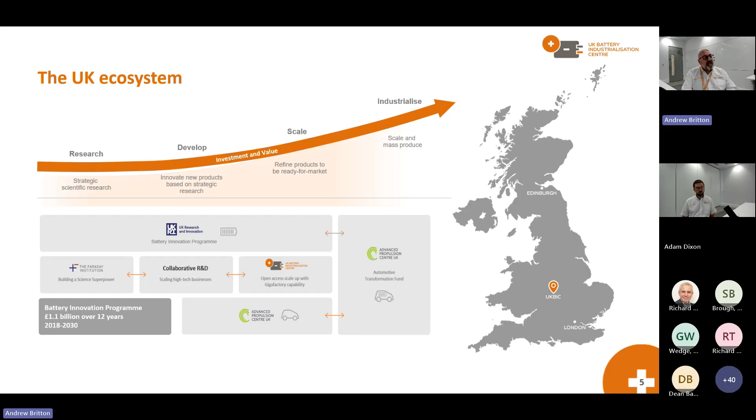In the latest spending review, the Battery Innovation Programme was given an additional £452 million of funding to support the battery industry going forward. That is money that will be available between 2025 and 2030. The structure will remain relatively the same: we will have the Faraday Institution, we will have the collaborative R&D running competitions, and UKBIC will be the scale-up facility within the Battery Innovation Programme going forward. So no major changes to the structure, but the organisation and the amount of funding has had significant changes over the last 3 to 4 months.

Where were we and where are we going? Historically, the battery industry or the Battery Innovation Programme has gram scale at the Faraday Institution stage, which is really looking at early stage materials research and advanced materials, what is going to come beyond lithium ion, proving out battery materials and components - really early stage stuff.

And then we move on to the kilogram scale, which is really looking at university scale pilot lines, and looking at early stage product development, starting to develop individual cell manufacturing at very low scale, and doing a lot of the product design there. Now, historically, we then jumped to what we now call the industrial scale-up line.

This was the next part of the journey for organizations looking to industrialize and scale up battery technologies. The industrial scale-up line is a gigascale line operating with gigascale type equipment that you would find in any gigafactory anytime, anywhere in the world - same equipment, same scale, same amount of material requirements. And it is there to help people de-risk their product and commercial investment before moving to the kiloton scale.

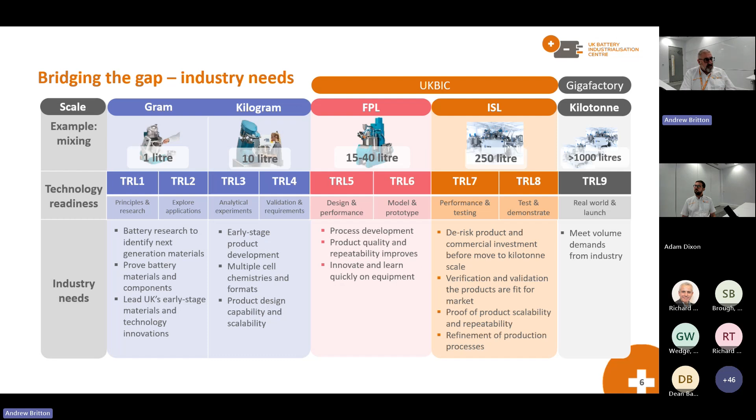At UKBIC, we have a full-scale electrode line, cell assembly, formation and test, and module and pack. Many of you will have seen this, heard it - it's been a constant through the history of UKBIC over the last 5 years. We are a UK manufacturing and research facility, based in the Midlands, in the heart of the UK, and in the heart of the industrial sector and industrial manufacturing in the UK.

We are open to all organisations who are looking to scale technology. And another thing that's changed over the last couple of years is that we are now a truly global operation, so it doesn't matter where you are - if we can help you to scale up your manufacturing, we are here to help you. We can give you access to gigascale equipment, and we can provide trials and validation at industrial scale with speed and quality.

One of the things that's always made UKBIC unique is that we do not want to own any intellectual property. So you will come to us with your IP, and we will scale that up, and we will jointly develop intellectual property between us. But at the end of the project, we will bundle all of that intellectual property up and return it to you. So there is no question of license fees, royalty agreements, or anything like that.

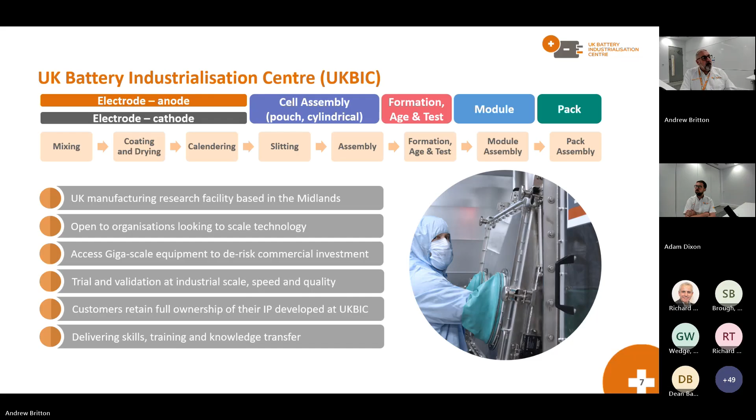So, talk a little bit about the industrial scale-up line. As I mentioned, it's a volume scale battery manufacturing facility. Same equipment that you will find in gigafactories around the globe, but we don't necessarily have to treat it as an end-to-end facility. It is a modular facility, so customers can come to use us at any part in the process.

We've had customers who've come to use our electrode line. We've had people who've brought powders and just want us to make a slurry for them. We've had people who've brought a slurry who want us to coat it for them. We've had customers who've brought electrode to us and who've wanted us to assemble cells. And all of that is absolutely fine. So you can pick and choose the parts of the process that you need.

UKBIC has developed 2 baseline cell designs, which can be used by customers to further develop and scale their own technologies. So if you've got an interesting new anode material that maybe you put some silicon in it and you want to see how it performs against a benchmark battery, we can put that material into one of our cells and show whether or not it gives you a performance benefit.

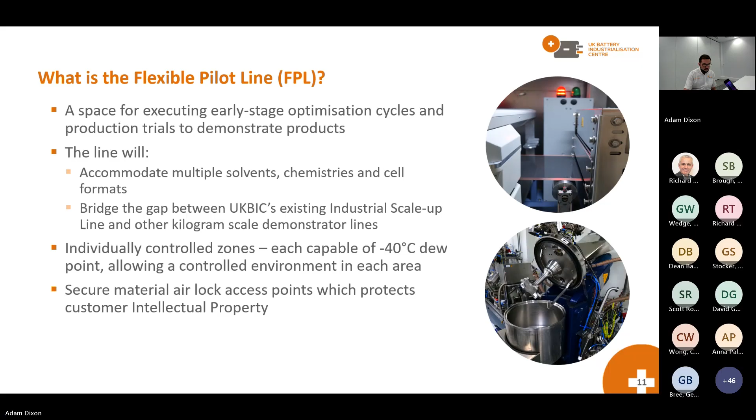Okay, so the next video which we're about to play is the FPL line all the way through. So I won't talk, but please take it in and watch it.

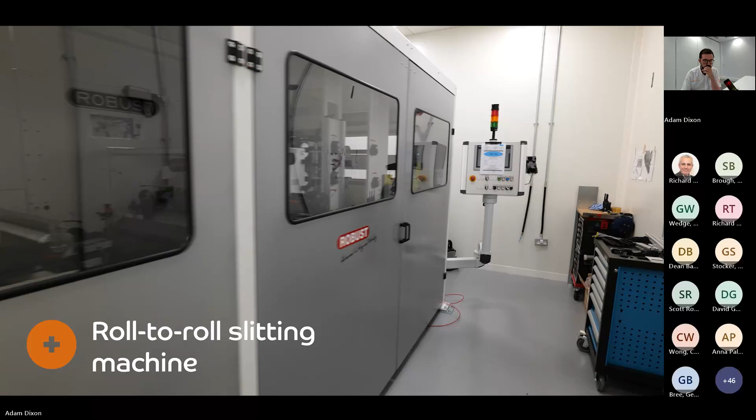So we'll touch on that video in a minute in a bit more detail, but obviously you've seen the end-to-end current state. To be honest, it's about 2 weeks out on that video, but that was the status of the line. As Andrew alluded to, it's in a commissioning phase at this stage.

So to recap, on what's been said and what I've alluded to early on, the benefits of FPL are it offers developers early access to battery manufacturing scale-up. This scale is a lot smaller than ISL. It's obviously bigger than university scale institutions, quite local here to Warwick Manufacturing Group, but it's definitely smaller than the ISL line, so it sits in a niche area for customers.

The line is called the flexible pilot line for a reason. We've adopted many things which enable us to go between chemistries, to have flexibility within control systems, to have the ability to handle multiple solvents, multiple materials, anode and cathode capabilities, low flash points, etc. So the flexibility is there.

The beauty of the line is it's smaller, so it will require lower quantities of material for customers. It therefore comes with low cost, efficiency, and quick turnarounds. We can go between anode and cathode quite comfortably because the line is smaller. We can go between FPL and ISL should customers want to do that.

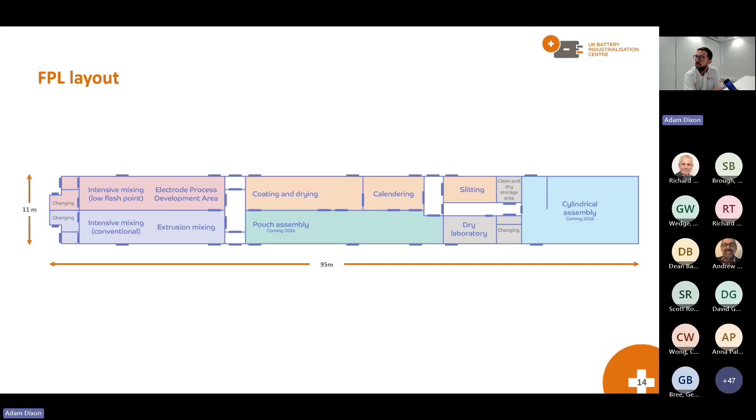Another unique part of this facility is we will have a dedicated store area, so we can quite comfortably store work in progress material at -40 dew point without the issue of expensive dehumidification. So we've obviously got dedicated dehums for those areas.

The first key process within electrode manufacturing is mixing. UKBIC has 2 dedicated mixing areas in its facility. As an ISL line, it has intensive mixing technology, and to adhere to that and for scalability between us and the ISL line, we fortunately have the same, so we can maintain the scalability of intensive mixing.

The difference being at FPL scale, we can do from 15 to 40 litres. These 2 lines have the ability to do conventional solvents, but we also have the ability to use low flashpoint solvents as well, from 15 to 40 litres. We also have some smaller intensive mixing lines.

These are part of an electrode process development area. The idea of this area is it's within the facility, but we can work with customers who don't necessarily understand intensive mixing technology, who maybe come into the business with planetary knowledge or other mixing technology knowledge. But obviously, to be able to work with us as a business, we need to convert those given recipes to stuff we can understand and process.

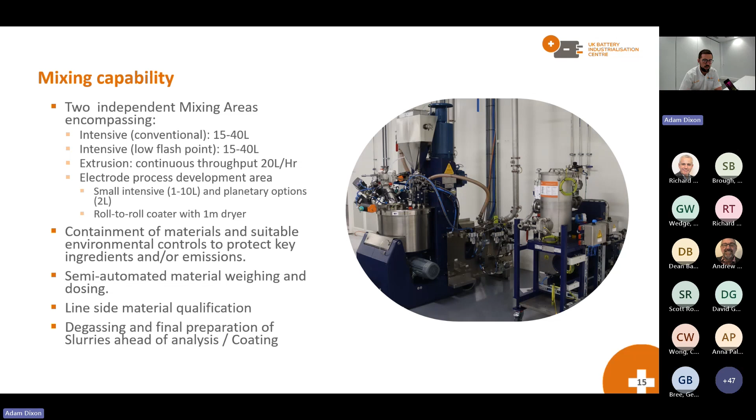The coating line, you'll see a video playing, I'll talk over the video. The video was the first processing of slurry that we did at UKBIC. You can see some anode continuous coating happening. This was probably over 2 months ago now, to be honest, so we're a bit more developed than this, but you can see some more visuals of the coater and the material.

We've subsequently switched to intermittent coating, which is more challenging, and we're now processing anode and cathode at the same time. The coater is a 6-meter dryer, and it focuses itself on slot die technology.

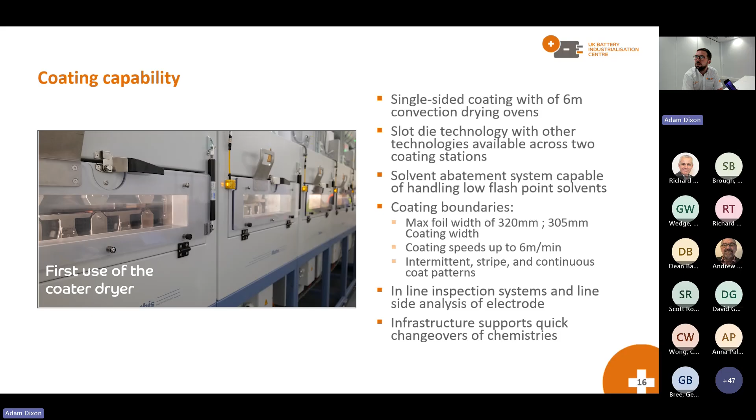We also have the ability to do other forms of coating through knife and comma bar. We also have ready ceramic edge coating. So we've got flexibility at the coating stations to be able to coat slurries, to coat ceramics, to coat meshes, metallized polymers. We're adept to be flexible.

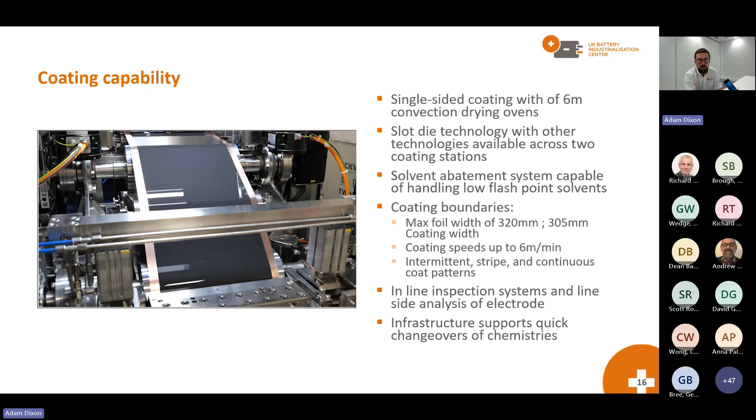As we said previously, we've got the ability to handle multiple solvents, so we're ready - we can handle it, we will have a permit in place which enables us to do that. We can coat up to 305 millimeters wide on a foil width of maximum 320. So it's smaller than our main line in its width, but the commonality is there for what we're trying to do. We can coat up to 6 meters per minute. We can focus on any particular pattern, which then goes towards a cylindrical cell, a pouch cell, or other types of cells.

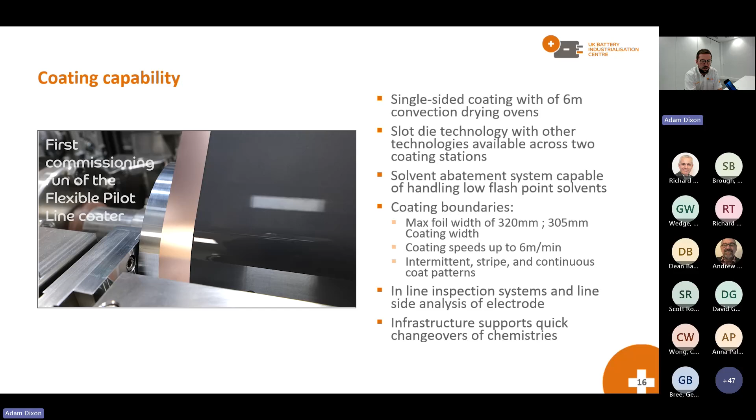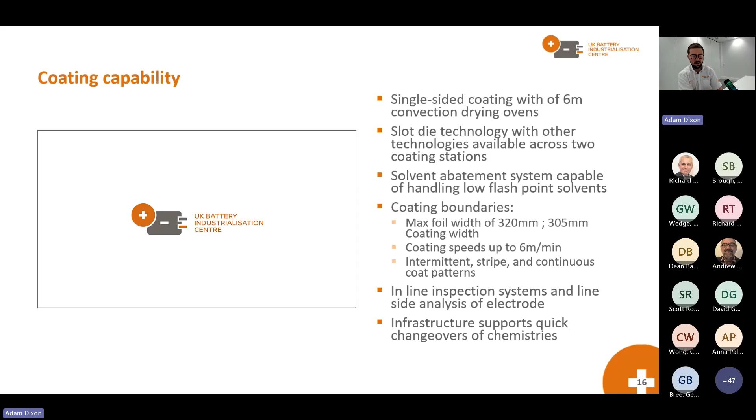We've got unique inline inspection systems. The idea of this line is we want to focus on traceability for the customer, so we've hopefully foreseen gauges in the right places, which enable us to give you good data to understand the product, etc. And you may think, why have we only got one coater? But we're quite confident in what we've done within FPL, that we've got the flexibility to go between chemistries quickly, and we have all the spares infrastructure in place to be able to do that.

From a calendering perspective, the image you see on the slide is the calender on the shop floor, albeit pre-commissioning. So what's unique about the calender? We've learned a lot at UKBIC about calendering. It's not a simple process by any means, it's not just squashing stuff - it comes with a lot of challenges. So a lot of lessons learned has gone into the calender design.

We have some similarities to our ISL line in the fact that we can calender at 150 degrees. We can use line loads up to 2,200 kilonewtons, but obviously this machine is smaller, so we can focus on smaller product - it's a smaller web path, and we can use less material. We've worked with a vendor who firmly understands the industry. We've got heating technology in the right places to help the product, to take away any imperfections, to get the right level of heating in before we compress it.

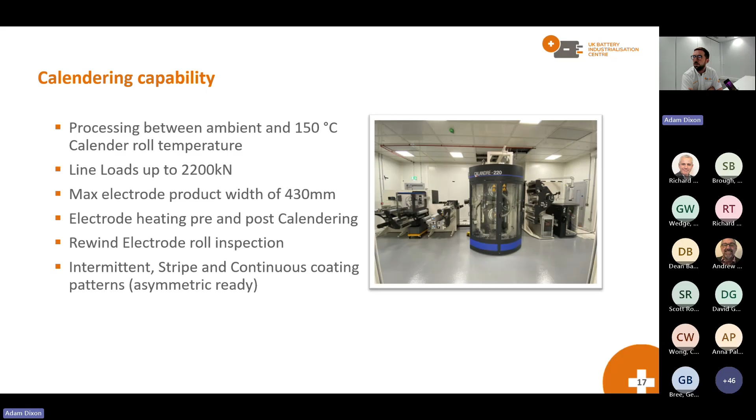And we've also made sure that we inspect the product, because we are firmly aware that we introduce a level of defects through calendering that we need to be mindful of before we pass this material through to cell assembly or back to the customer. And like the coater, it is suitable for all types of patterns.

The last machine in the electrode processing area of FPL is the slitter. The slitter is capable of running up to 80 meters per minute, so it outstrips the performance and line speeds of any of the kit that we have. But what we are able to do is go between anode and cathode independently, because we have cassettes. We have the changeover infrastructure to be able to do it.

We've heavily focused on the cleanliness of the electrodes, so we've got adequate cleaning inline to take away the imperfections caused as a result of slitting, like burrs, etc. And we can handle, unlike some of the other machines down the line, wider widths. So the view is that we can also use this machine to slit foil, where we also have challenges in the business.

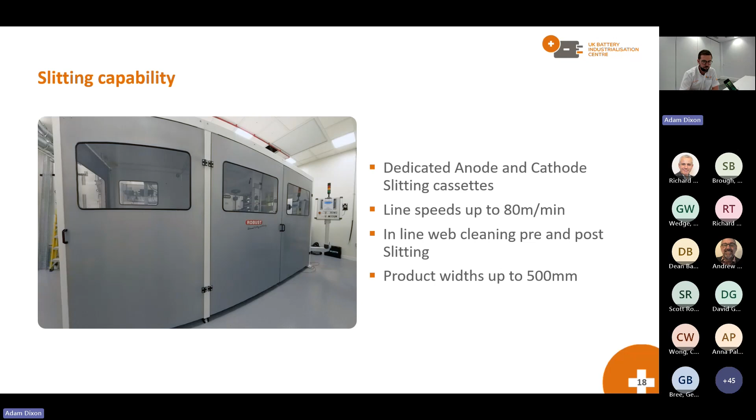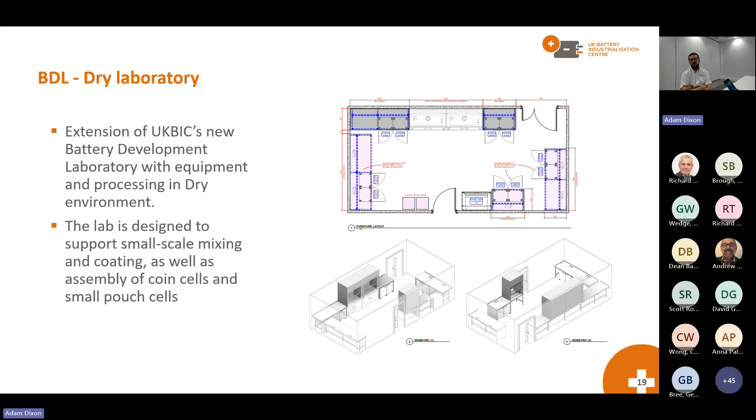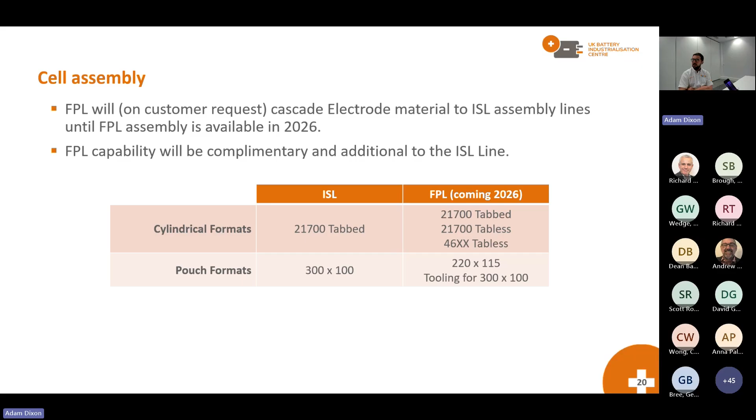So that's all of the areas of FPL covered in a nutshell. And just to recap, to hone in on the message, we're a small facility, we're flexible, we can accept smaller quantities of material, but the view is we can take those small quantities of material and still get a good amount of electrode material out of the facility to be able to produce cells in-house, or for you to take back and use yourselves for your own electrode development or future cell assembly.

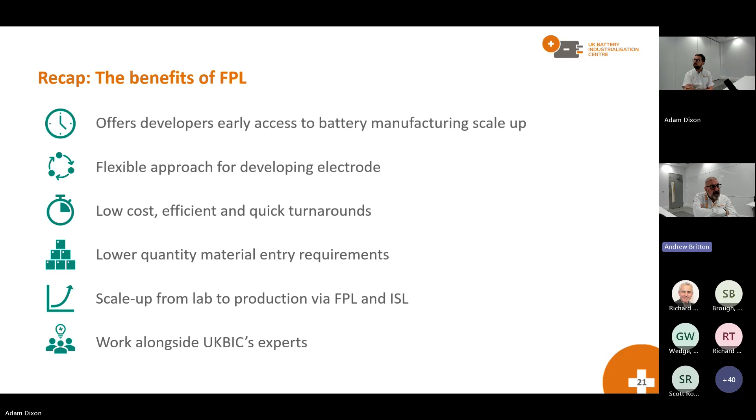Any more questions? I think we're pretty much at the end of the questions, and out of time as well. That's been a really good session, thank you very much to all of you who've asked questions. They've been extremely useful in helping develop the knowledge of the attendees for this webinar.